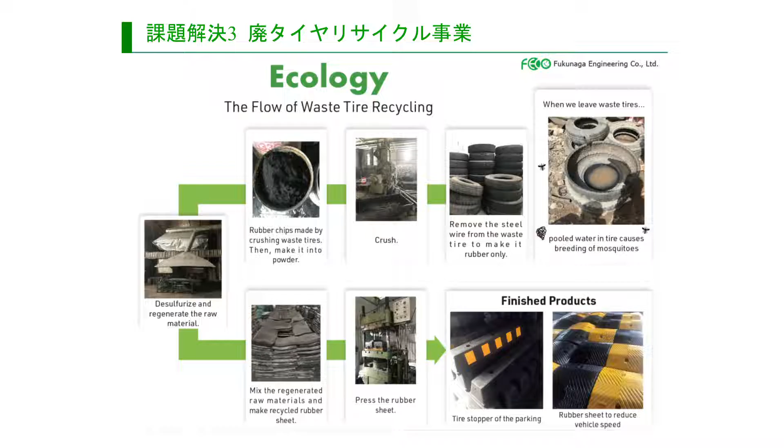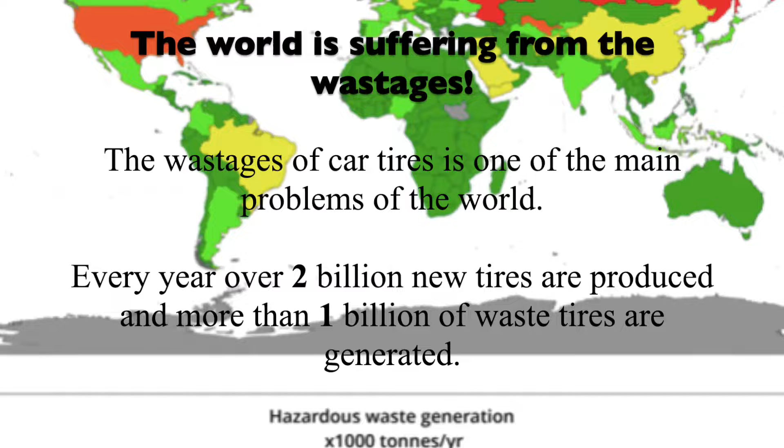The world is suffering from wastages like wastages from food, plastics, papers, rubbers etc. and the wastages from used tires is one of the main challenges of the world. Based on the recent data, the world is producing over 2 billion new car tires per year. And more than 1 billion waste tires are generated. And this amount is huge for disturbing the natural environment and leads to environmental pollution, economic and social impacts also.

Among the 17 Sustainable Development Goals, the management of waste tires or recycling business is directly related with SDG Goal number 12 or Goal of Sustainable Consumption and Production. And also, it is indirectly related with the SDG goals of number 11, 13, and 15. Because retreading or recycling of waste tires contributes to the protection of environment and climate change, and also it contributes to clean cities development.

In relation with this, the motto of Fukunaga Engineering is tireless pursuit of an environmentally friendly, sustainable business model which is fully motivated on environmentally friendly business and matched with SDGs concerns. And its philosophies are: 1. Continuous pursuit of environmentally friendly business. 2. Create new businesses and innovative ideas through research and development. 3. Customers, employees, and shareholders' happiness and co-prosperity with local communities.

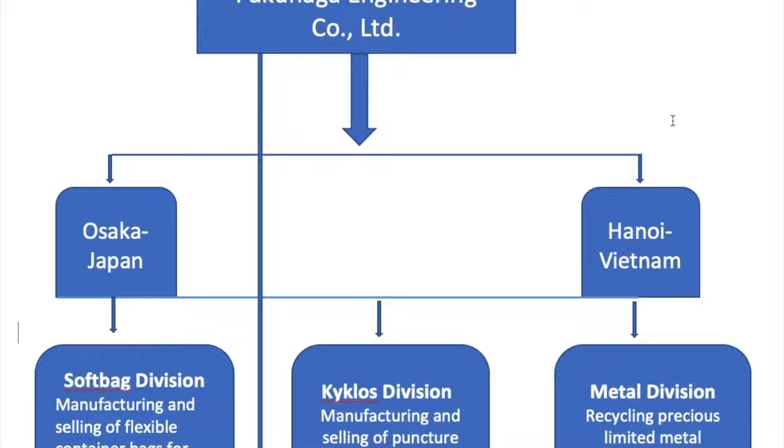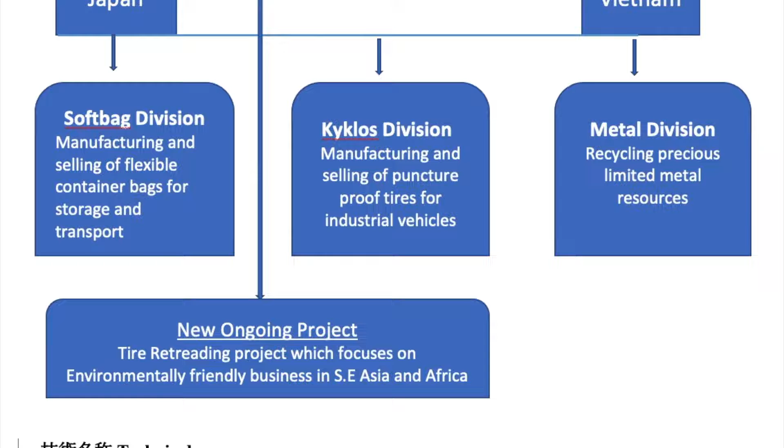Fukunaga Engineering was founded in 1994 as a metal recycling company in Osaka, Japan, and also has a branch in Hanoi, Vietnam. Fukunaga Engineering has been working on 3 different divisions mainly. 1. Soft bag division, or manufacturing and selling of flexible container bags. 2. Kyklos division, or manufacturing and selling of puncture-proof tires for industrial vehicles. 3. Metal division, recycling metal resources. And finally, the new ongoing project called tire retreading or recycling business.

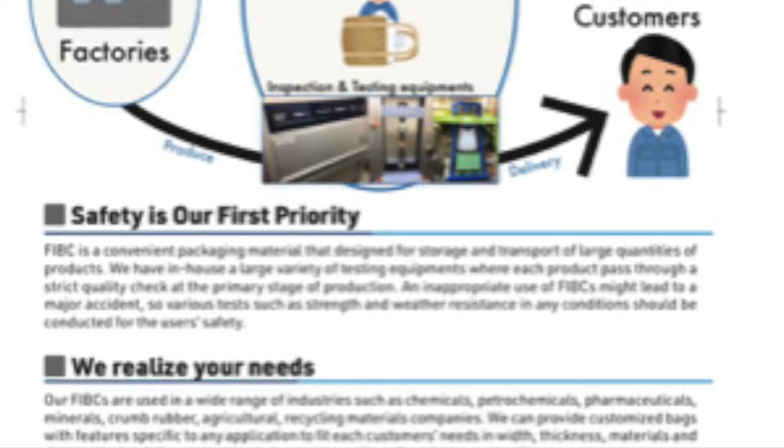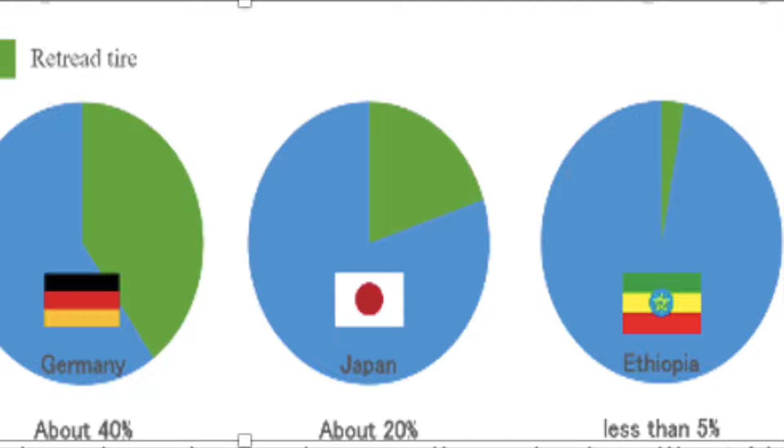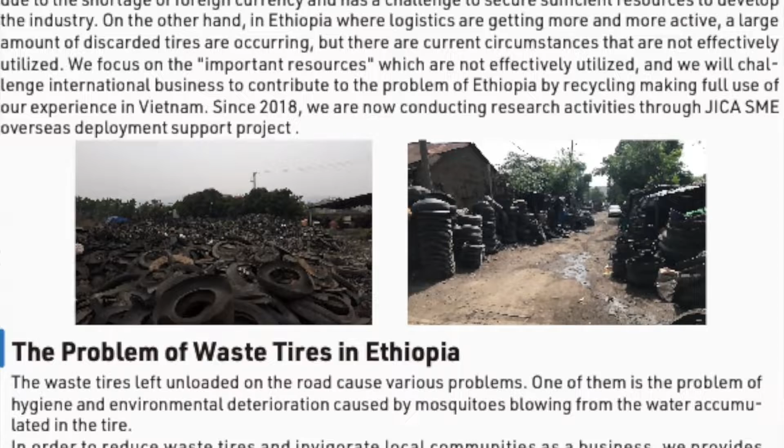The reason why we focus on developing countries like Ethiopia is because the ratio of using the retreading technology is very low in developing countries compared to advanced countries. And the challenge is high in poor countries from 3 different perspectives: economic, environmental, and social impacts. Despite the increasing demand of using tires, based on our investigation we found the following challenges in Ethiopia. 1. High dependence on importation. 2. Shortage of foreign currency. 3. Lack of awareness and limited capacity on using tire retreading technology.

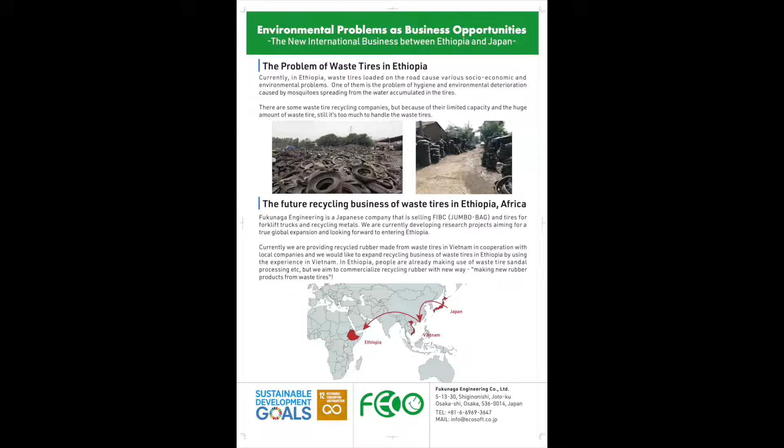And the following videos, pictures, and graphs show the images of the real situation of waste tires in Ethiopia, Addis Ababa, the capital city of Ethiopia. The images are taken just from the streets and in the compound of some companies.

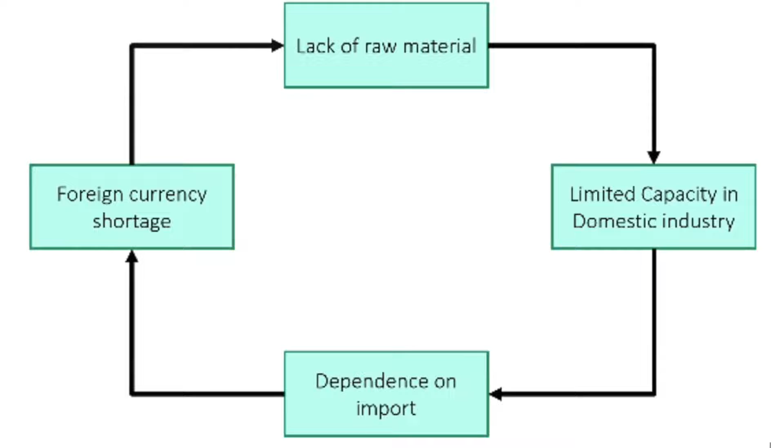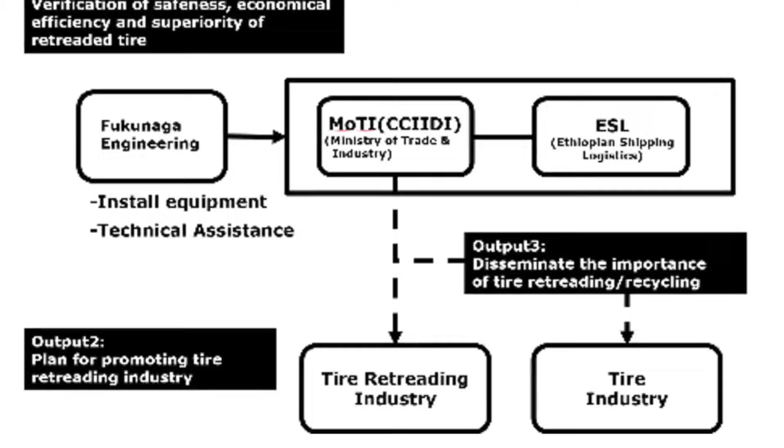So, in order to solve the above critical problems of waste tires, JICA proposed an SDGs verification survey project to help developing countries like Ethiopia as a grant or technical cooperation. And based on the impact and importance at national level, the proposed project to be implemented was the tire retreading project. And the company Fukunaga Engineering was the one selected to implement the project by cooperating with the government of Ethiopia. Regarding the technical process of the tire retreading technology, there are 9 steps or processes from the beginning up to the end.

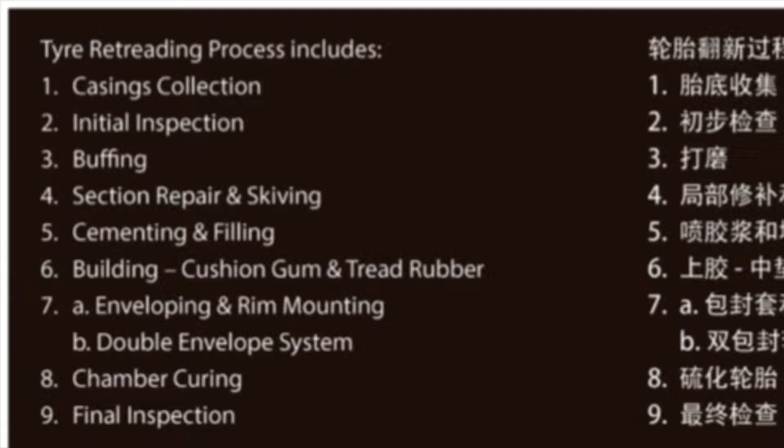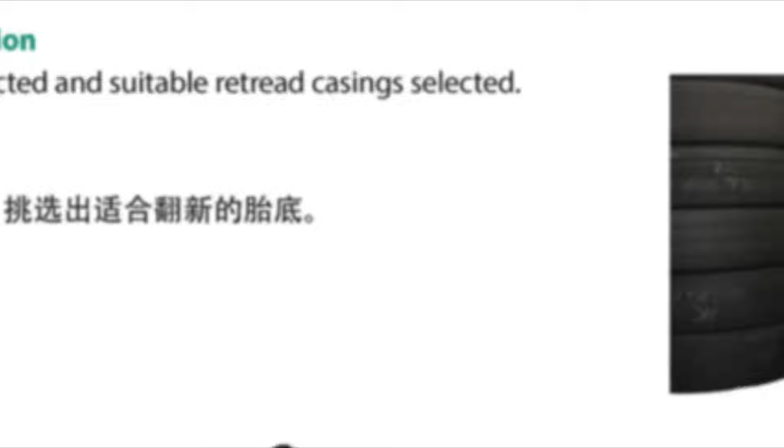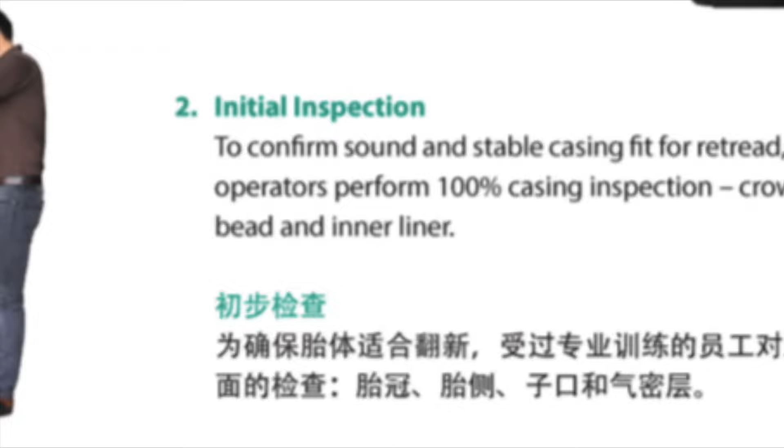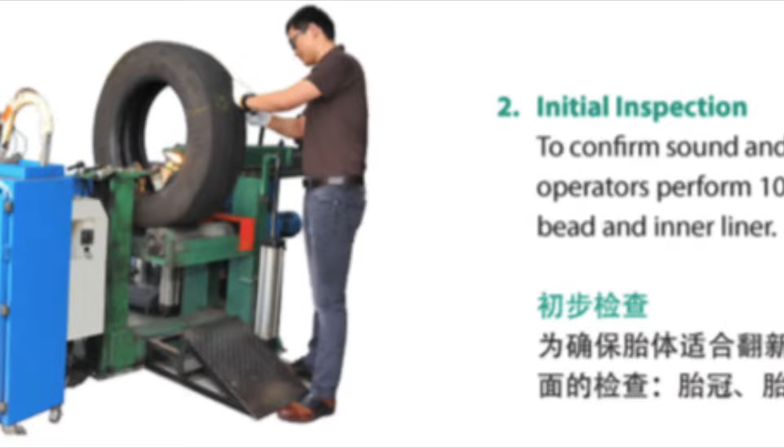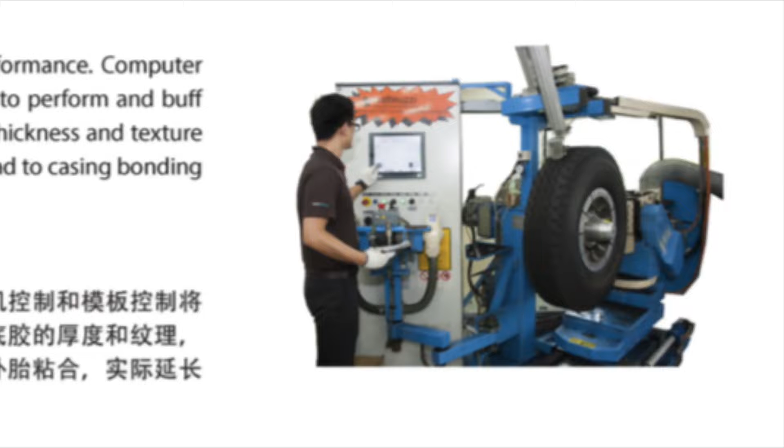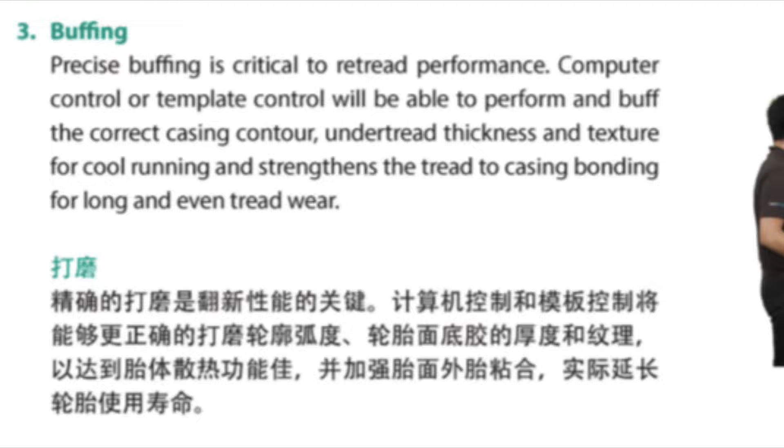Step 3. Buffing. At this stage, the casing is inflated to its operational shape, and the process removes the worn tread surface, trues up the roundness and prepares the surface for a new tread. Step 4. Repair. At this stage, any damaged material identified during initial inspection is removed and repairs are made, essentially returning the casing to a useful life. Step 5. Applying cushion. An uncured bonding layer is extruded onto the prepared casing surface and all skives are filled. That means the casing is ready for a new tread. Step 6. Building. In this step a new tread is automatically applied with attention to precise detail. The tread must be straight and perfectly centered on the casing.

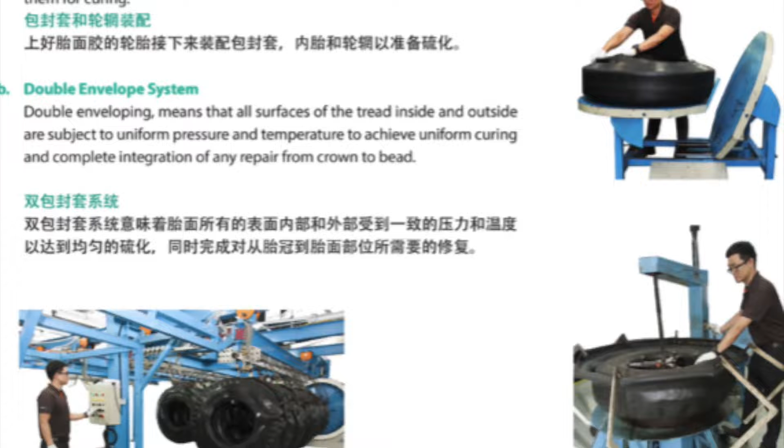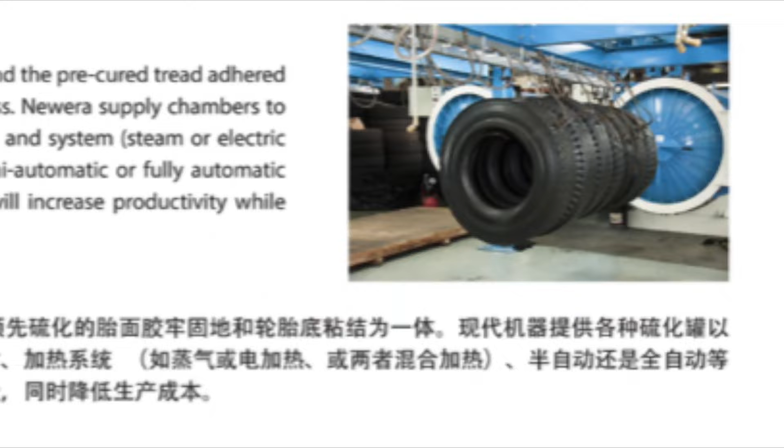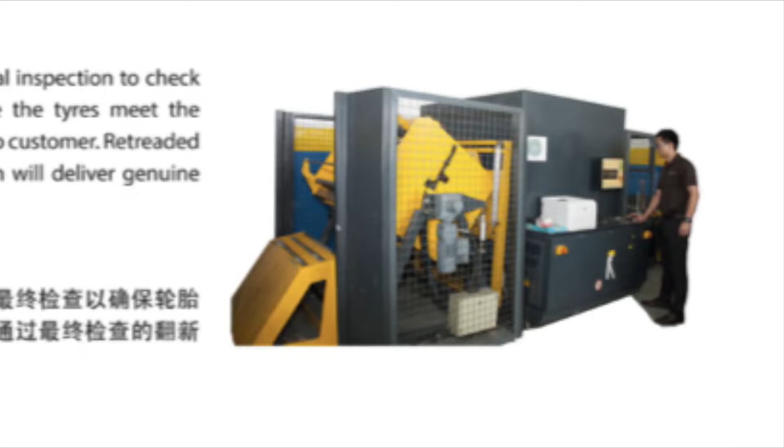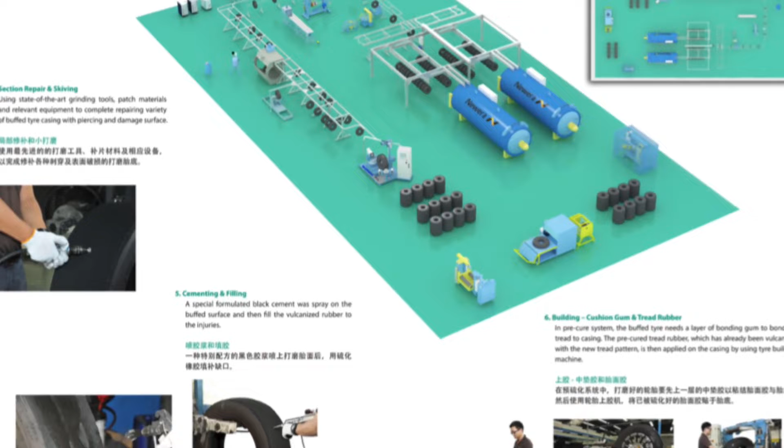Step 7. Enveloping. This is the step where the assembled but uncured tire is encased in an elastic envelope and prepared for curing. Step 8. Curing. In this finalizing step, the curing chamber causes the bonding layer in the tire to cure and permanently adhere the new tread. Step 9. Final inspection. A visual, hands-on inspection is repeated to ensure the quality specifications are met. And this shows the whole image or structure of the installation of the tire retreading process in order from the first step until the last 9th step.

Finally, with a spirit of partnership and development, Fukunaga Engineering is calling for business partnership and working together in order to expand environmentally friendly business in all directions of the world. Advancing technologies can be spread in the world only when we are willing to share experience and capacity with each other, so that we are able to create a world which is suitable for all of us.